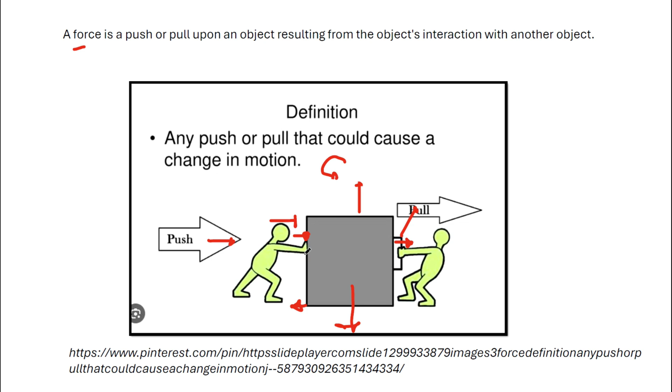That's a force. And there's also a twisting force, like when you turn a screwdriver or you have a ratchet turning a nut. That's this twisting force, and that's referred to as torque. We're going to talk a bit about that.

So let's dive right into torque. This is really interesting. We just talked about force, and pushing or pulling a block is one thing, but what if you want to tighten a nut, a bolt, or a screw? We're going to be twisting. You have to apply a force to it, but it's not a linear force, not a force in a straight line. It's going to be, in this case, sort of a rotational force.

Okay, so we have a wrench. Where's the force applied? Well, the force is applied by your hand at some point along the length of the wrench. But the wrench is not going to go in a straight line exactly, it's going to make a series of turns. That force is applied at a certain distance along the wrench. So here's diagram B. What's going to happen is you get this twisting motion right here, and the amount of force or twisting motion being applied to this nut is called torque.

So I just like to think of torque as a twisting force. It's a bit different, but that's basically what it is, a twisting force. Now the interesting thing about torque is, again, we are applying force at a distance. Force at a distance.

The units of force are typically pounds. In fact, when you measure your weight on a scale, it's not really your weight, you're not measuring your mass, you're measuring your weight, and weight is a force. It's the force of gravity, wherever you're weighing yourself, pulling you towards the center of the earth. So you're measuring your force in pounds, that's what you're measuring. So when someone says go measure your weight, say, oh no, I'm going to go measure my force, that's what you're measuring. Anyway, that would vary depending on how far away you are from the center of the earth. Gravity weakens the further we get from the center of the earth, but by a minuscule amount based on the surface of the earth and elevations and such, but it does.

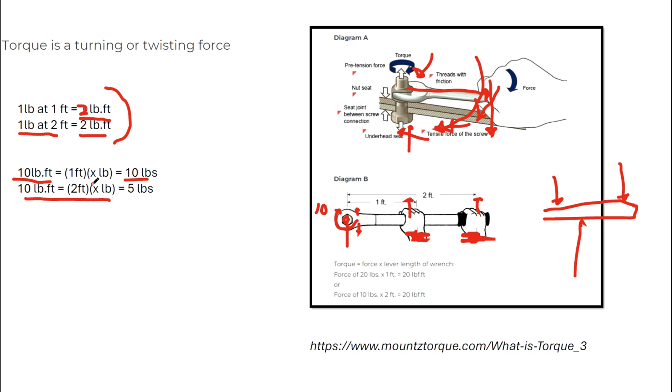So let's calculate it. We've got 10 pound-feet of torque at 1 foot away. How many pounds of force are going to be applied right here? 10 pound-feet equals 1 foot times X number of pounds. Take 10, divide it by 1, we get 10 pounds. Now let's take that same 10 pound-feet of torque and go out 2 feet, with a scale to measure the force. 10 pound-feet equals 2 feet times X number of pounds. Bring that 2 over, divide it into 10, now we have 5 pounds.

So the further we go out, the less force will be measured at any given point on this lever, when the axle itself is doing the driving. It's the opposite of when we're using a lever to apply torque. Hope that makes sense—if not, go back and watch it and run the numbers.

One more thing, gear ratios. This is the end of the theory, then we'll move into the problem. I want you to stare at this for a second. That's why I like to take pauses, to stop and think if I missed anything. Real quick, going back to this example.

Of course, friction would be in this direction—assuming the wheel's not slipping, friction is what propels you forward—equivalent to that 10 pounds as well. So you'd have 10 pounds of road force. Now get a larger tire size, twice the radius—a 2 foot radius, just like we measured. Now our road force is 5 pounds, the amount of force applied to the road to propel you forward. So by doubling our tire radius, we've halved the amount of force on the road propelling us forward.

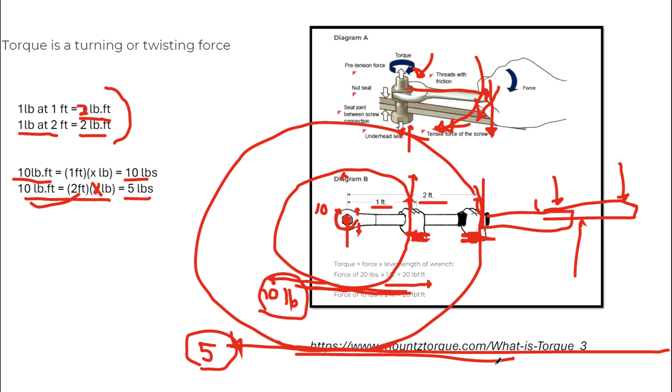If for every rotation of the drive shaft we're traveling a larger circumference, which becomes a linear distance on the road when the wheel spins, then we're going to be going a further distance, meaning our actual road speed will be higher than what's indicated by the speedometer. So for example, your speedometer might read 55 and you might be doing 63. That's the problem with larger tires: reduced road force, lack of acceleration, and increased road speed per the speedometer reading, resulting in an uncalibrated speedometer.

Now, this final theory slide, I'm not going to look at here. We're going to look at reduction gears.

Gear ratios are given as the driven gear divided by the drive gear. This is the gear being driven; this is the gear doing the driving. So it's basically a diameter ratio, which is the same as the number of teeth ratio, or the radius ratio - doesn't matter. In this case, there are 10 teeth on the drive gear and 20 teeth on the driven gear, so the ratio is 2 to 1.

When you see final drive ratios in a car, you'll see 3.73, and you'll say it's a 3.73 or a 3.11 or something like that. Well, all they're giving you is the first number, because the second number is always going to be 1. So just keep that in mind - it's always to 1.

So what happens here in a reduction gear situation? This is overdrive - I don't want to talk about that. Almost all the gearing in our car are reduction gears, almost. So what happens is two things with respect to gears. Number one, when you have reduction gears, we have an increase in torque with respect to the driven gear and a decrease in speed. That's the trade-off: we can increase the torque if we decrease the speed.

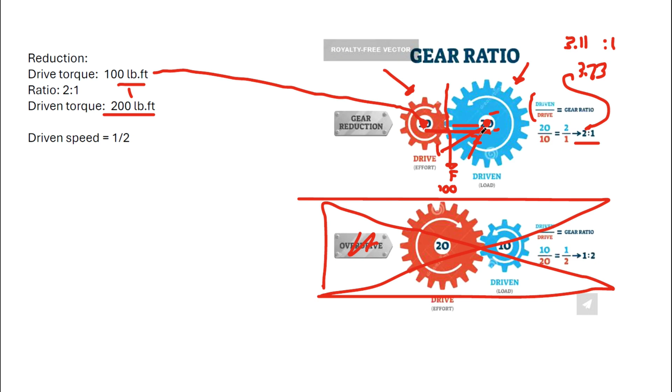So basically gears are like a series of levers - you can look at each tooth as a lever. Each tooth is a lever, and you just run your torque numbers. It's that simple. It would be like this - that's a bunch of levers on your drive gear, and here's a bunch of levers on your driven gear. You have torque and you have distance. It's really, really simple. Now that's an increase of torque - it's a ratio of 2 to 1, and that 2 to 1 will basically be your increase in torque ratio.

But remember, that comes at the expense of a speed reduction. Let's think about it intuitively. This gear has 10 teeth, this one has 20 teeth. If this rotates 1 full revolution, that means 10 teeth have gone around. Only half of these teeth, only 10 of these teeth have gone around, which means this one has only rotated 1/2. So that's a 1/2 speed reduction. Simple. So if this is being driven at 100 RPMs, this is going to be driven at 50 RPMs. So that's our trade-off: increased torque, decreased speed. That's it.

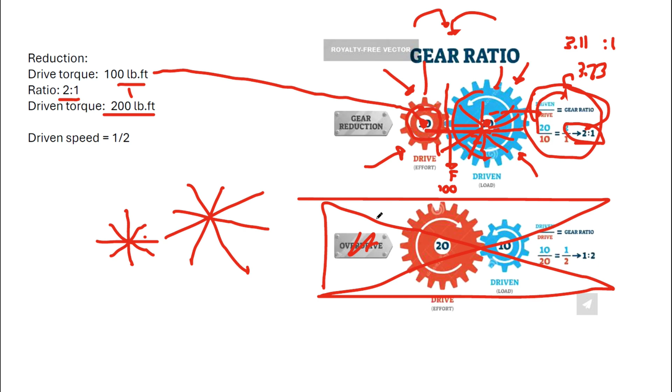Okay, let's get into the problem. With an increase of tire size, think about your truck now, going from 30s to 36s, let's say. As I mentioned, we're going to experience a decrease in road force, meaning poorer acceleration. It's going to be very noticeable. Also, you're going to experience a higher ground speed for the exact same drive shaft rotation. The speedometer will always read low.

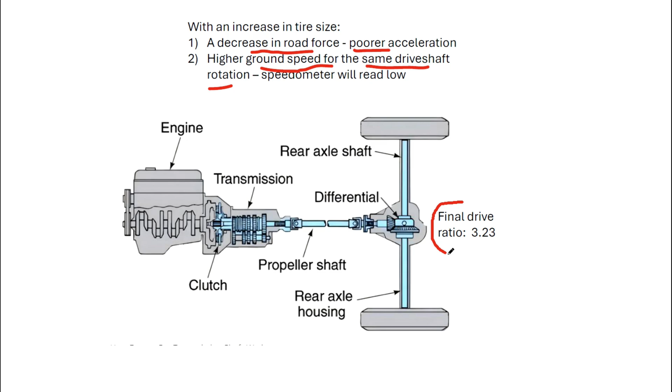So what can we do to fix it? We've increased our tire size, our diameter or radius, however you want to look at it. Well, we can't re-gear our transmission. Our engine's fixed. So there's only one thing we can do. We have these final drive gears back here, and these can be adjusted, these can be changed to compensate for the increase in tire size. That's what we're going to be talking about today.

Now, if you want to stop here and not learn the theory behind it, which I think is fascinating, there's a real simple formula: new tire diameter to old tire diameter, times the old axle ratio, will be the new axle ratio. I'm not going to run the numbers here, but it would be basically, now remember, new to old, so it would be 36s divided by 30s times 3.23.

Well, let me see what it says. I'll just do it while we're here. 36 divided by 30, times 3.23... 3.88.

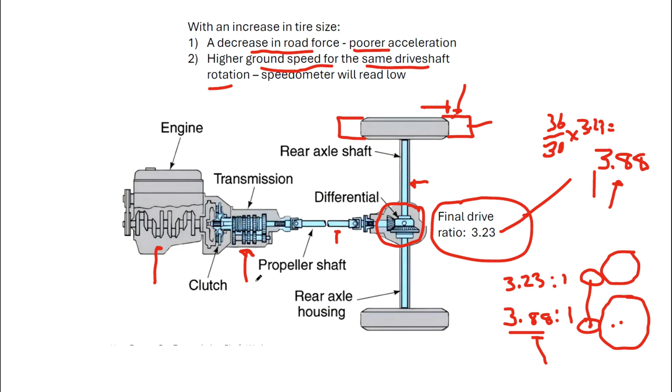All right, so that could be the end of the video right there if you wanted, but that doesn't show you the whole picture. I want to give you the whole theory, the holistic approach here. Let's talk first, and let me give you an example about road speed, and then we're going to get into road force. This is the interesting part of the whole thing.

Now, I've decided, this is kind of awkward, there are many ways to demonstrate this, but I've decided to demonstrate it in a way that I think makes the most sense. Because your speedometer is going to be taking readings off basically the drive shaft speed. Now, there may be other variations of this, but let's just pretend in this example your speedometer is calibrated by taking readings off your drive shaft speed. We want that because, remember, if we took it off somewhere up here, well, these gears are constantly changing, these rotations are constantly changing when the gears are shifting. And also, if we took it off of engine speed, well, engine speed is going to be the same, while drive shaft speed varies based on what gear you're in. So engine speed wouldn't be a good indicator. What's a good indicator is basically drive shaft speed.

So this speedometer is calibrated. There's a gear in there that calibrates the speedometer to road speed based on your final drive ratio and your stock tire diameter. It knows these things, and with that, it's basically a multiplication factor, a gear ratio that says, if this drive shaft is spinning this many revolutions a minute, and I know this ratio and this tire size, I know the circumference of the tire, then I know the ground speed. And it doesn't change.

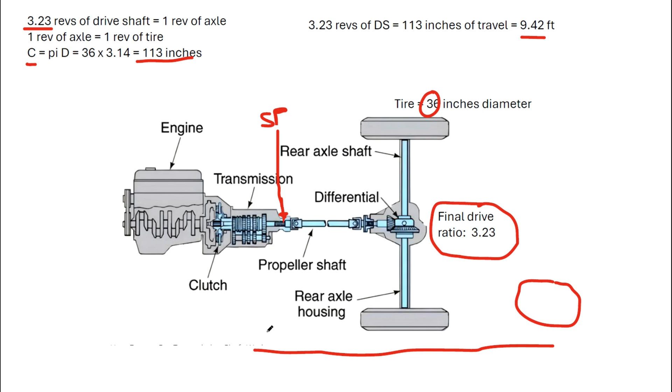The speedometer is dumb. The speedometer is looking at the drive shaft. It thinks everything's the same - it doesn't know you changed tire size. So the speedometer says in these two scenarios you're going exactly the same speed. Except you're not. Because before you changed the tire, for that many revolutions of the drive shaft, you traveled 7.85 feet. After, you traveled 9.42 feet, meaning you're going faster - not by an insignificant amount either, by a pretty significant amount. That's why your speedometer is out of calibration if you did not change the final drive ratio.

Okay, let me hit pause right here and we'll pick up.

Okay, let's talk road force reduction now. If you like cars, you're going to like this. Let me give you an example, and this is a vehicle that I own: a 1985 Dodge W150 4x4. It has a 318 V8 that produces approximately 300, 305 foot-pounds at the engine at 2,500 RPMs.

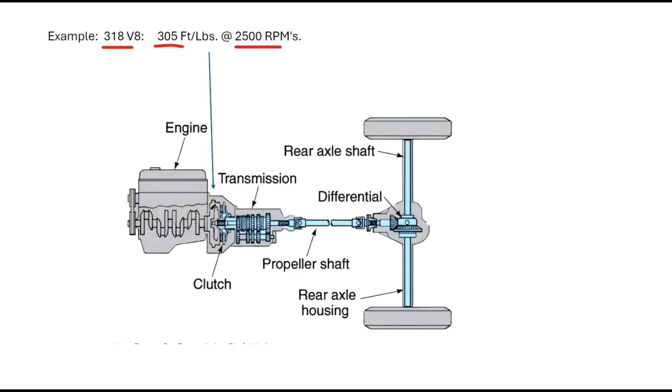I'm going to use that as a baseline to start the calculations here - that's the engine torque. Now, the gear ratio - I can choose any gear, I can choose 1-to-1, but I'm just going to choose first gear because that's how we start accelerating from a standstill. A lot of times we're in an off-road situation, we're in first gear - that's when we need the most torque we're going to get, unless I'm going to ignore the transfer case right now. Let's just say we're in two-wheel drive.

But it all comes out the same. So the ratio of the first gear in the transmission that I have is 4.56 to 1. So based on what we've talked about, there's a 4.56 torque increase.

And, of course, speed reduction. But we're interested in torque right now. We don't care about speed.

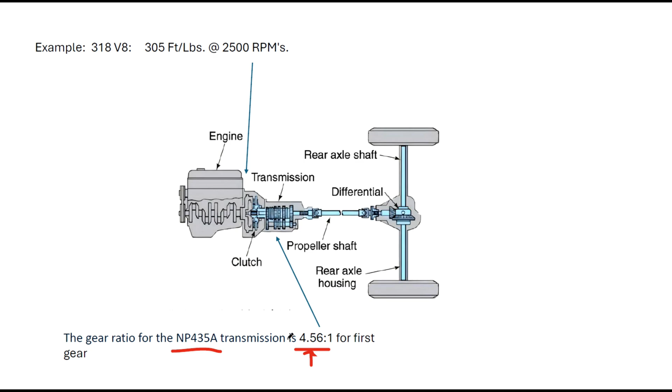Okay, so that means the torque output of the transmission in first gear is 305 times 4.56. It's 1391 foot-pounds. It's quite an increase in torque. Of course, it comes with a corresponding decrease in rotational velocity or speed.

We're also going to ignore, in this case it says there's a clutch in here, but even if it was an automatic transmission, you'd have a torque converter, and torque converters actually almost double your torque when you're taking off from a standstill, and eventually that torque multiplication goes down to 0 as you're cruising, but we're going to ignore that. It doesn't matter.

It all still comes out the same. The effect is the same. So let's ignore torque converter torque multiplication, which sometimes is on the order of 2 to 1, plus or minus a half.

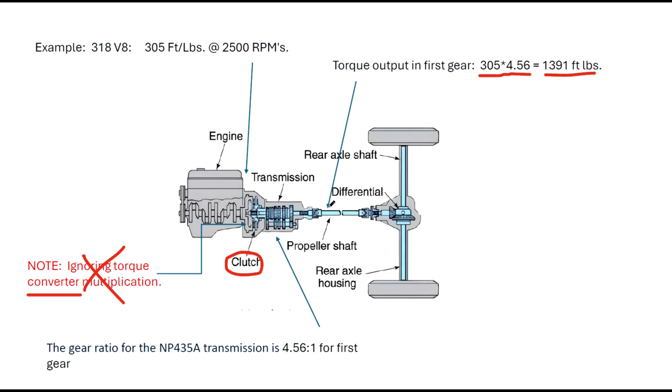Okay, so now we have our torque on our drive shaft in first gear of 1391. Here's our final drive ratio, 3.23, which is not atypical for a standard half-ton truck.

So what's going to be our axle torque? Well, once again, we have a reduction gear, so we're going to increase torque again, decrease speed again. So axle torque is going to be our 1391 from the drive shaft multiplied by 3.23, so 4493.

A lot of torque. We're going to ignore differentiation, but I will say, like we mentioned before, you go around a corner, outer wheel spins faster, inner wheel spins slower. We mentioned that before. Velocities have to add up. Okay, velocity can't disappear. Well, torque can't disappear either.

And the way an open differential works is it's going to split the torque between both tires, the faster one and the slower one, with the majority of the torque going to the wheel spinning the fastest. And that's why an open differential will easily get you stuck in a mud puddle, because it's going to send the torque to the wheel with the least amount of traction. That's just the way it works. And that's the need for lockers and limited slips and others.

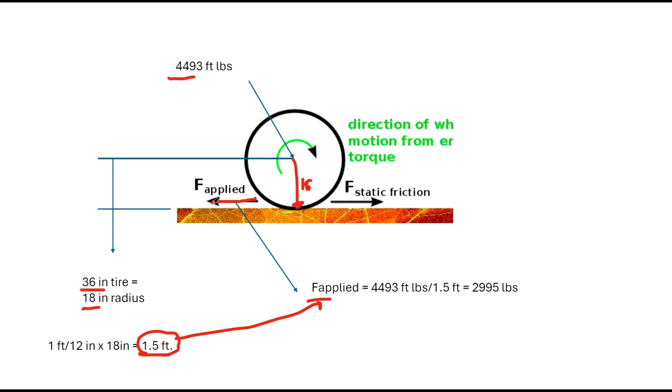Now let's see what happens if we increase tire size. We're going to go to a 36-inch tire with an 18-inch radius, which is 1.5 feet radius. What's the force applied? The torque doesn't change, that's at the axle, it stays 4493. What changes is the diameter, we went from 15 inches to 18 inches, so that's 1.5 feet. What's our force applied to the road? 4493 divided by 1.5 is 2995.

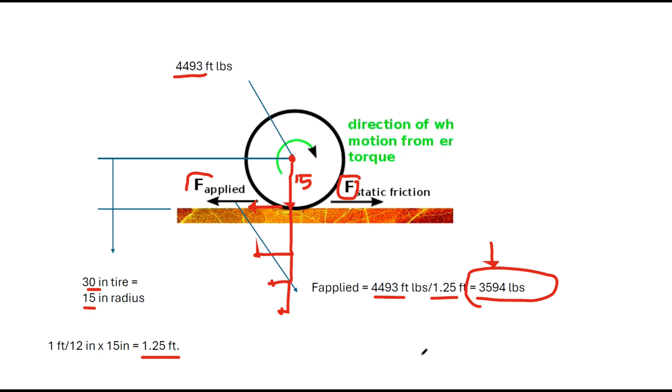What was it before? 3594. So that's like 500 some, almost 600 fewer pounds applied to the road. That's not insignificant. That's why you notice you're not accelerating as fast. It's 500 fewer pounds of force applied to the road just going up from a 30 to a 36.

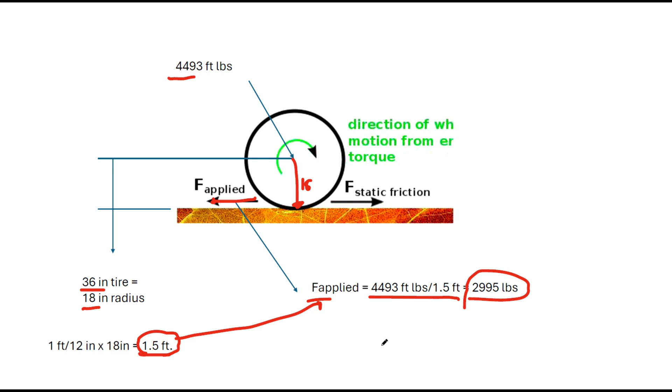In this scenario, given the gear ratios and the first gear transmission ratio, how do we fix it? I just ran the number, it's a 16.7% decrease in applied road force with the larger tires. 16%, almost 17%, is not insignificant. You're going to feel it.

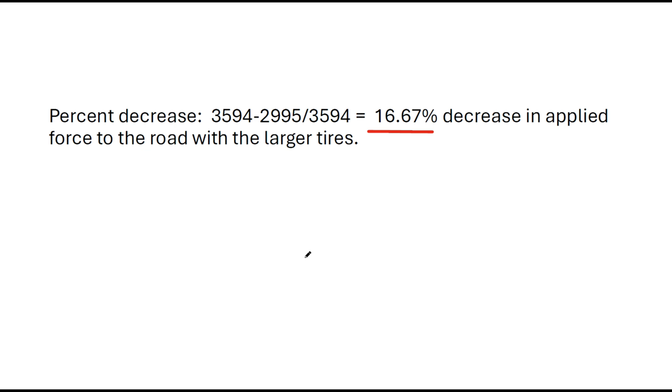So how do we compensate for it? We're not going to go in and change our transmission gears, that would be insane. We're not going to do anything to the engine, the propeller shaft doesn't do anything. The only thing we have to alter is our final drive ratio. If this is our old ratio, how do we increase torque to increase that force? We need a larger driven gear. The driven gear is the ring gear.

That larger ring gear is going to do two things for us: it's going to increase the torque and decrease the speed. So that's going to compensate for both of our deficiencies at the same time. Remember, initially I ran that real simple equation, new tire divided by old tire multiplied by the gear ratio to get your new ratio. But let's do it the long way, just to see exactly what's happening.

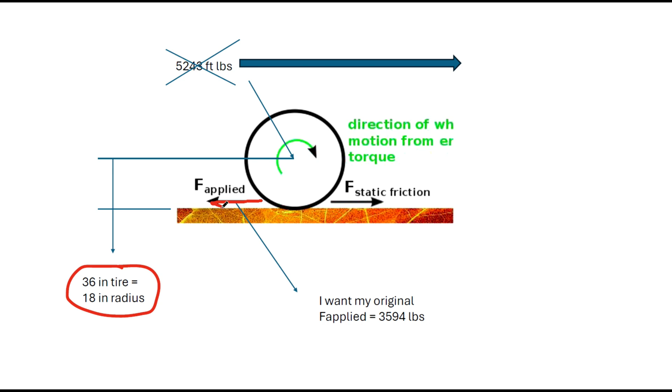So I've got my 36s on there now, let's see exactly what's happening here, and this is the fascinating part. This decreased my applied force to the road. Initially I still have right now my 5243 foot-pounds of torque here. How do I increase the applied force to the road? I need to increase the torque on the axle, that's the only way to do it. And so I want to increase the applied force back to what I originally had, my 3594.

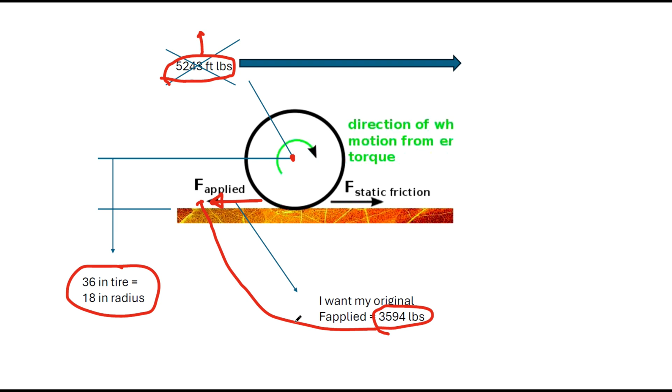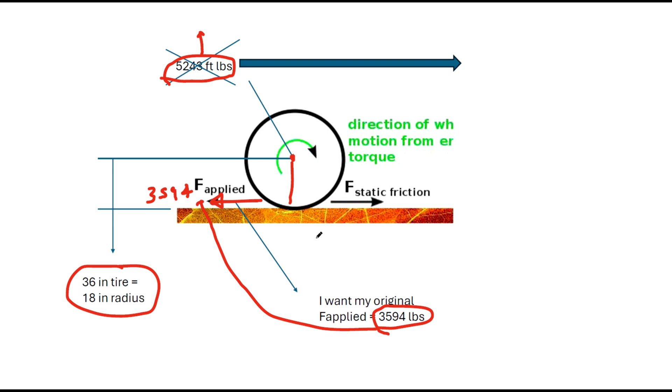So remember it went down to 2995, and I want to increase this applied force to 3594. How do we do it? Let's do everything in reverse. Here's our 3594, and we know we have a distance of 1.5 feet to the pivot point or the axle. So what torque do I want here to get that road force? Simple multiplication, 3594 times 1.5. I need a new axle torque of 5391.

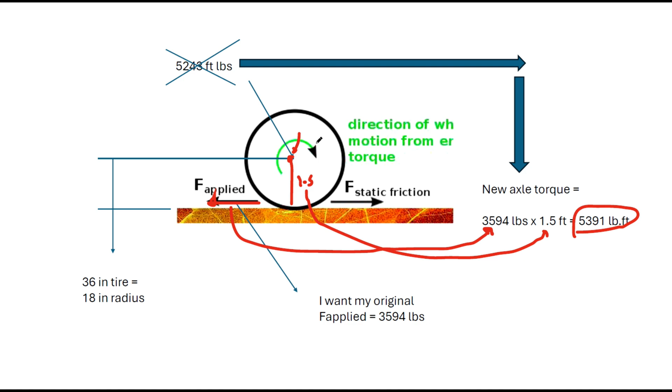So from this to this, 5391, I need a new axle torque of 5391. How do I do it? Increase the ring gear, meaning raise the gear ratio, that's how I do it. Let me hit pause here just for a second, I need to get a sip of water.

Okay, doing a lot of talking, so got a little dry. We know the torque we want here is our new 5391. We also know the drive shaft has the same torque we always had, 1391. That's easy, our 1391 from the drive shaft times our new ratio will equal 5391. So we just divide and get 3.88. 5391 divided by 1391 torques will give you 3.88. So we went from 3.23s up to 3.88s.

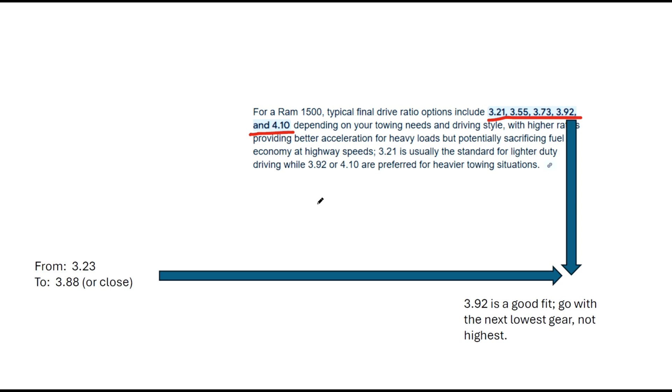So I'm going to have to select from what's available. You take the 3.88 and go to the next highest or next lowest ratio. 3.88 that's not good. 3.92 is the next lower ratio - higher number but lower gear. 3.92, it's pretty close, it's a good fit, the next lowest gear available to me. 392s.

And if you remember when I ran that original quick calculation, it came up with 388s as well. I just did it the long way to show you. So I'm going to select my 392s and pop them in there.

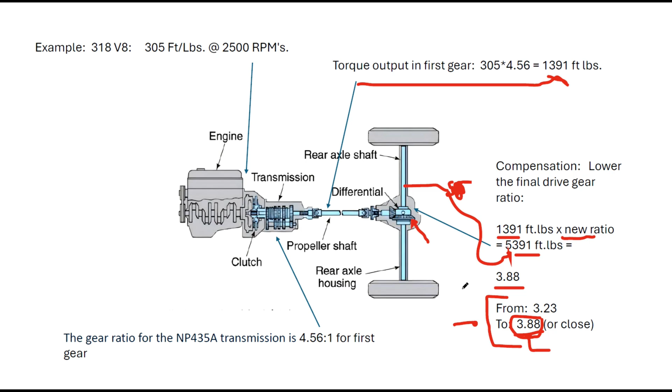With 392s, it's going to be almost identical on speed, and it's a slightly lower ratio than 388s, but not by much. You'll get your original road force and maybe a little tiny bit more, and your speedometer will only be off by a smidge, nothing to worry about - probably off by the width of the needle, unless you have a digital speedometer. I have an 85, so I have a needle. So yeah, that's how that works, and that's the theory of it. We regain our road force and we reduce our speed equivalently.

All right, so let's take - this was our final drive ratio of 323. Here's 392. Let's run a couple numbers here, look at what happens with respect to speed. Let's go back to speed now.

So if you remember, with our original ratio, 323s, every 3.23 revs of the drive shaft, we travel 7.85 feet. And when we went to our 36s, for every 3.23 revs of the drive shaft, we traveled 9.42 feet, hence we were reading low on the speedometer.

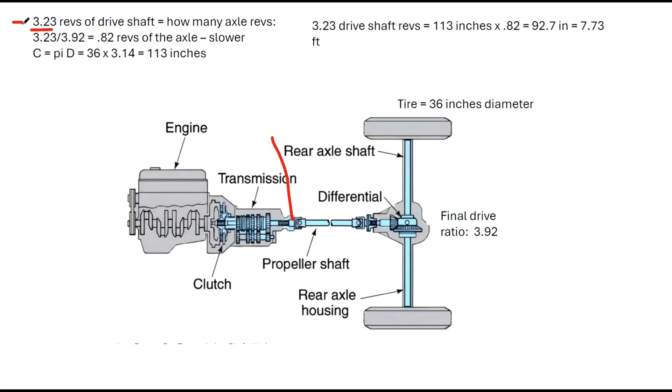Now what happens? There's a number of ways to do this, I kind of did it the long way, but for every 3.23 revolutions of the drive shaft - and that's because the speedometer is connected to the drive shaft, so I want to keep this equal - now we have our 36-inch tires. 3.23 revolutions, 36-inch tires, for one rotation of the axle, 113 inches.

However, with the new ratio, remember before, for every 3.23 revs of the drive shaft, we're going to make one revolution of the axle. Now with our new ratio, for every 3.23 revs of the drive shaft, we're only going to make 0.82 revs of the rear axle. Remember, it's going to get slower because the ring gear got larger. So we've slowed down the axle. So that 113 inches of travel before the new gear ratio, we're just going to multiply by 0.82.

To get 7.73 feet for every 3.23 revs of the drive shaft, which is almost identical - very close, basically 7.85, 7.73, almost identical - the distance traveled per revolution of the drive shaft. So that's how we fixed the speed problem, and we've also fixed the ground force problem. It's all done.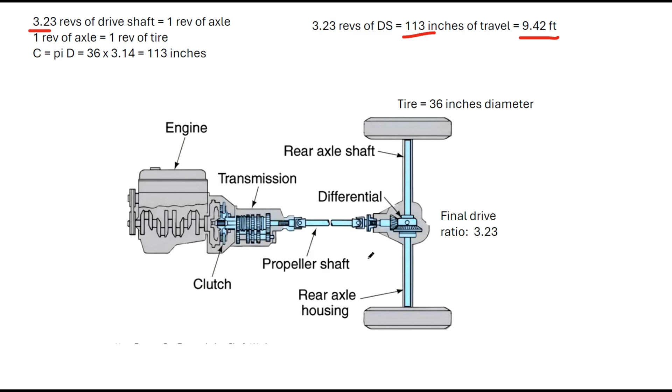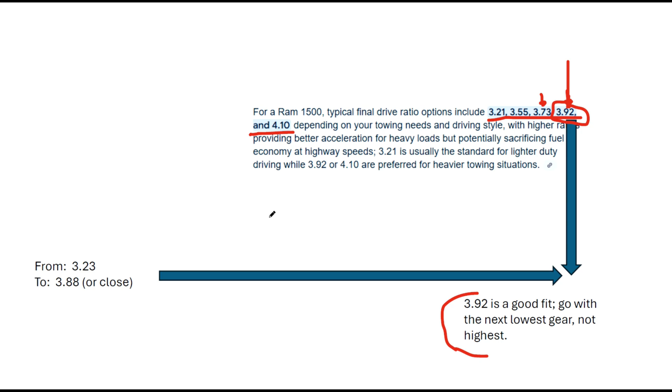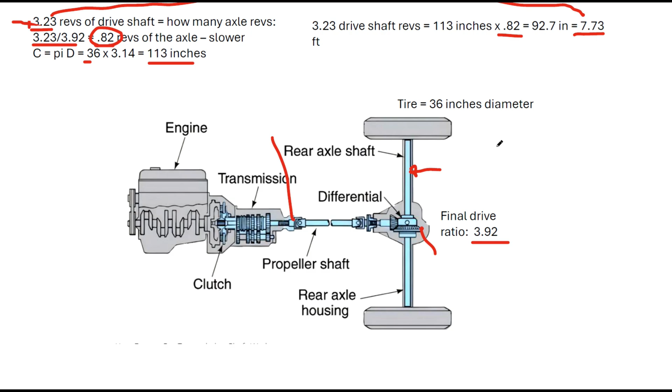3.92, that was a little off because I picked a standard ratio that was available, and that's what you're going to have to do. So actually, what's going to happen in this scenario with our new ratio, traveling just a little bit slower, so the speedometer is going to read just a smidge fast, which is good - you won't get a speeding ticket. And we'll get a tad bit more ground force because we selected the next lower ratio, not the next higher. And there you go.

I hope that makes sense, and hope you enjoyed it. And that's the theory of it - torque, speed, gear ratios, and what's actually going on when you pop some larger tires on that beast.

One thing I'd really like to discuss in the future, if I have the time, there's so many myths. I used to talk a lot about audio equipment and stereo equipment. There's so many myths in the automobile industry I'd love to discuss. One of them is exhaust scavenging - there's so much BS out there about that, and what effect it actually has, how much of a difference it makes, and how to handle it and make it work for you. There are other really interesting, obscure, esoteric, arcane topics I'd love to hit in the future. So I hope you enjoyed this.